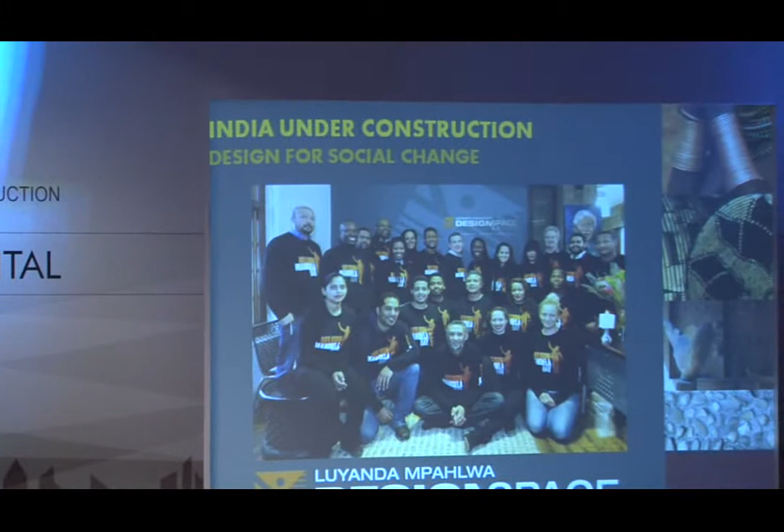Our focus in our practice is making sure that young designers and young architects have an opportunity to learn from what we do, but also that we learn a lot from them.

We are very much influenced by our cultures, our people, our lifestyles, our forms, and we derive our influence in architecture and design from the simple things that people do, like how they use mud to decorate their floors or their walls.

We use texture, we use all the things that, especially in the African context, have been used over decades to beautify themselves, using metal bangles and all that.

We asked ourselves, why doesn't architecture actually start addressing this and reflecting this in the buildings? When we did the South African Embassy in Berlin, we had to get a group of women who have practiced an indigenous technique called litema in Sesotho. It's basically about using carved plaster to decorate walls and do murals.

In fact, they used to do it in mud in those days. Today they actually do it in carved plaster, and the end product is actually mixing oxides into the plaster.

This is what then becomes the kind of colored, textured finish that we've been able to achieve, especially in that building, which has been mentioned to have received an award of excellence.

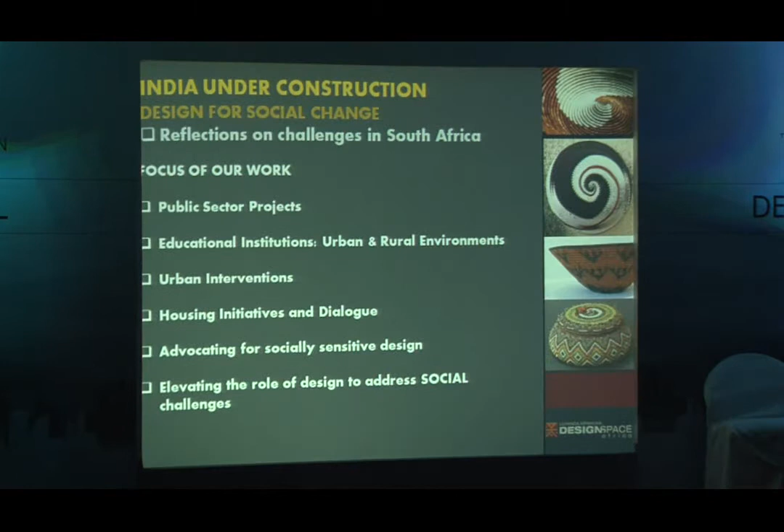This conference for us is very important. It resonates with the work we do, and I feel like I'm actually in good company. I think a lot of what I hear and what I see is not far from what we are trying to do.

Speaking about architects in India and in Palestine, I realize that these are countries, cultures, and people with rich and deep histories.

Our histories in South Africa in particular have been totally eradicated, and part of our work is trying to actually find what has made people sustain themselves over time.

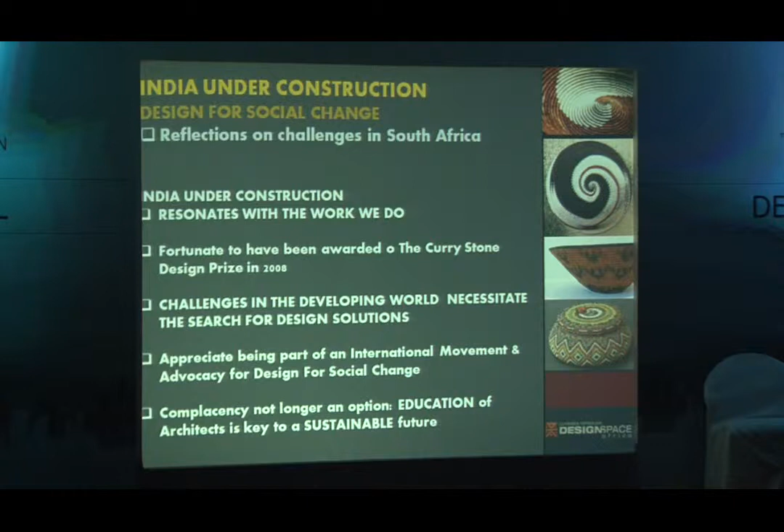Now I will briefly deal with housing, because as we were preparing for this conference, I was asked about challenges in South Africa. I'm very happy to speak after someone who's actually a specialist in housing.

We do have a government program that seeks to address mass housing, especially for the poor. This is based on a subsidy system, which basically identifies beneficiaries based on their income. The lowest beneficiary income is 3,500 Rand.

That's about, multiply by 5, so around 15,000 rupees or something like that.

You get a subsidy of about 80,000 Rand for a 42 square meter house. The next level beneficiary will be those earning around 8,000 Rand, and they then get access to either cheap loans or some kind of subsidy.

The government has negotiated with commercial banks to try and assist in running this project. But I don't think South Africa was ready, or had the proper infrastructure, to actually implement this huge task of building the millions of houses showing in the backlog.

The more houses we build, the greater the backlog actually becomes. That's the reality of it.

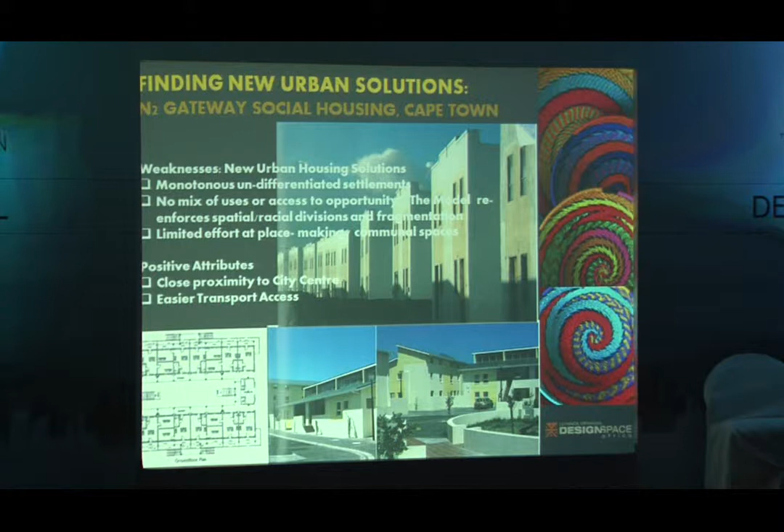So we were invited to be part of a process of trying to contribute low-cost housing design by Design Indaba in Cape Town. And the real challenge of this place is that there's no spaces, as we've been hearing the whole day, no spaces for people to unfold, to recreate, for children to grow, for children to play, which is basically what children want to do.

And what you also find is that there are challenges of fires in these places because they are unsafe. They are built with materials that actually will catch fire. People use paraffin stoves; even though there's an insurgence of electricity, you can see the poles similar to the streets of Delhi and Mumbai that I see. But the dangers of fires are real, because Cape Town is a very windy city. Any fire that catches spreads like wildfire, actually.

And what you find in these places, obviously, is the dense and informal economies, which is about urban survival. There are people who are actually producing the shacks so that you don't have to build your own. You can actually get it prefabricated, and then you just go and build it.

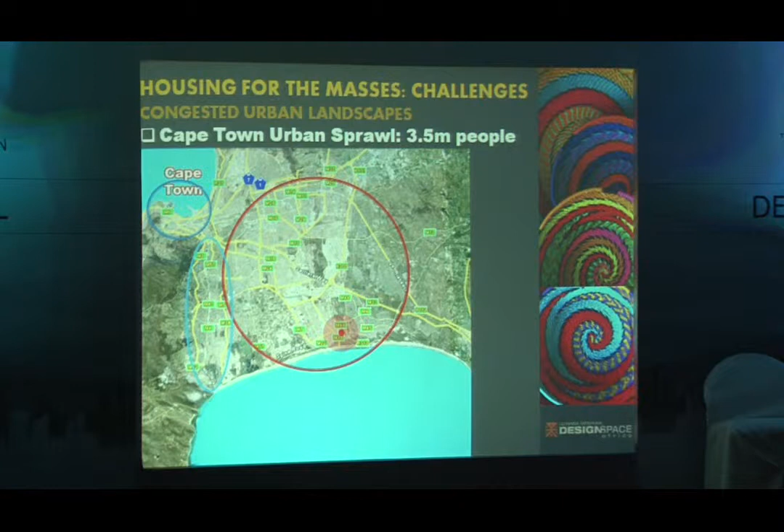That is what is supposed to be the area where black people live, and in fact in South Africa we have South Africans of Indian origin who have got their own areas. We've got black people who've got their own areas. We've got colored people with their own areas. It's still there, but maybe physically it's going to take us decades to actually change that environment.

These are how the townships work or feel like. Quite established areas, and you can see there's a lot of temporary stuff happening along the edges, and then you've got the new areas happening at the back. And this is just another picture of the roofscapes of how it actually looks, all built under power lines, and people tap. There is a huge electrification process that has happened in both rural and urban conditions.

Now, what we did then was to, as part of this design and our process, investigate how architects can respond differently to these challenges. And we found that architects actually hardly ever discover things. They find the potential of materials that are already there, and then use those differently.

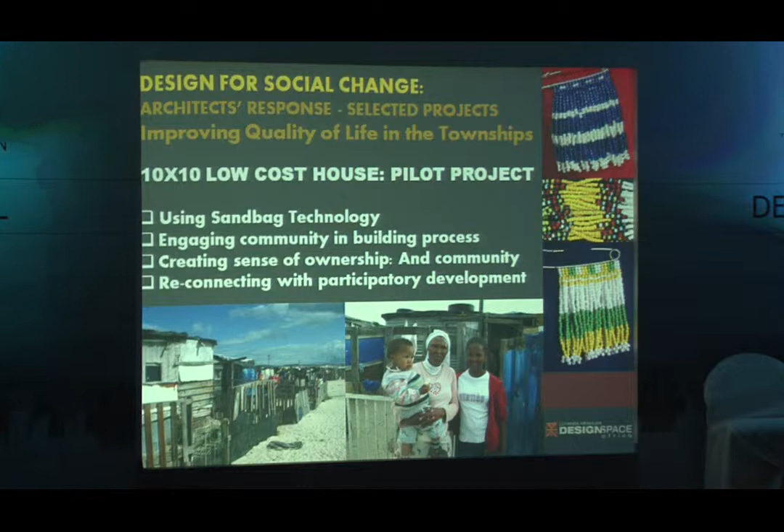So we found the sandbag construction, which we felt is quite important in that it actually brings back the aspect of community being involved in building. And we found that this is a very important thing. It's been mentioned the whole day, how people derive ownership by just being involved. And this was very important for us.

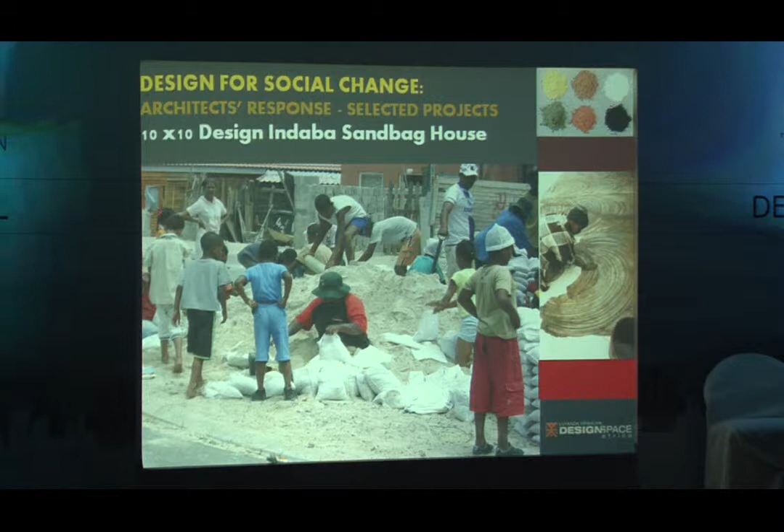During construction, we had the entire community of the 10 buildings we're doing, building from one house to the next. And we obviously had to first convince them that building a sandbag house would get them a decent housing product. We had to use models to actually explain how the system works.

It's a timber frame structure, basically, spaced at about 900 centers. In later projects we've reduced this to about 600 because it makes it easier to build and to plaster or to clad. You have the bags packed in between that structure, then you have your wire mesh so that you can have your plaster holding onto something, and then you paint after that.

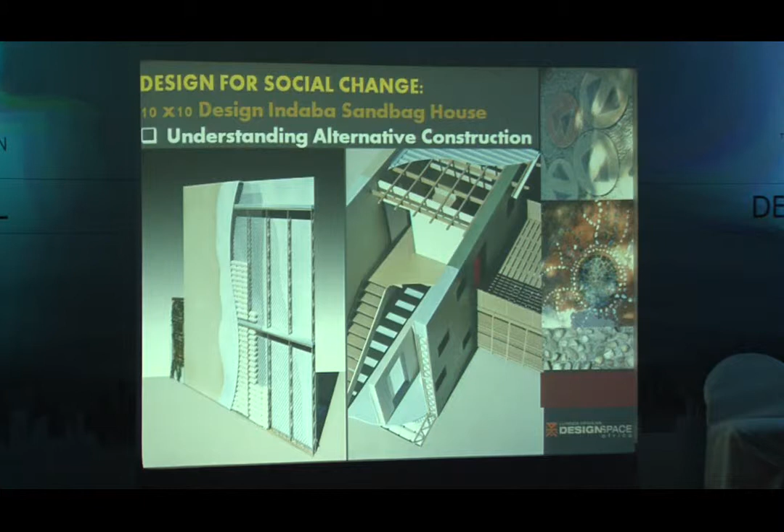We use all this to convince the people that firstly it will be a safe building. We worked with engineers who had to convince us that we need a ring beam here - this is the only place where we've used concrete, and at the top here to hold the roof, because the eco beams are actually only about 2.5 meters high. You could have them longer if you use a different material, but we've tried to avoid materials that have a toxic or high energy content in manufacture.

And this is basically the plots that were allocated. Unfortunately, we could not change the fact that everybody was allocated a plot. If I had the choice, I would have liked to do a completely different urban layout.

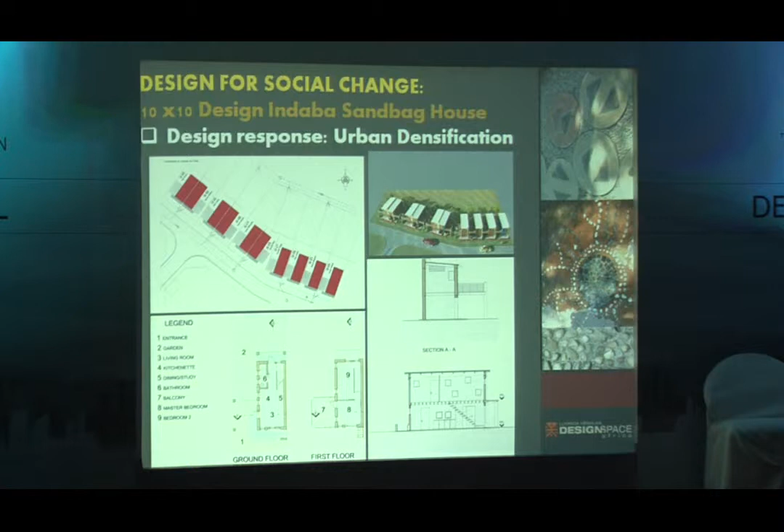This is simple double-story buildings with the bottom being kind of a lounge kitchen area with stairs going up, wet cells at the bottom, and then you get your stairs. We did 2 bedrooms at the top, the bigger one being the children's, because the people who live here have large families. We tried to make sure the kids have space and a little corner where they can study. The parents get a smaller room, but they also get a balcony outside, which we saw as an area where the house could grow - kind of an incremental approach, things we learned from the Charles Correas and so on, but doing it at a very small scale here.

This is how it happened - these timber frame structures with a metal lattice were brought to site, and we were engaging with the community in terms of getting this put up. No foundations other than basically having sandbags on the floor, on the ground, and then you put this thing on it. Because we've got quite high water tables, we provided some kind of damp proofing, and then the building goes up. This was kind of like the start of the ground floor.

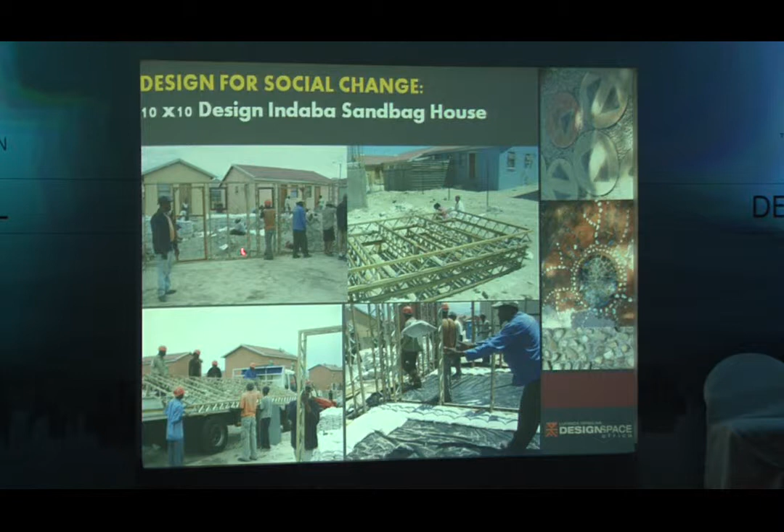And so it goes on, and I think this is the building that has made us to be actually here in India, because when you do these small, very problematic, almost difficult projects, you realize that they give you more than any embassy you've built - this kind of project has made us as known as we are today. We think it is an investment. It is social capital. It is design that makes a difference, but it's also design that engages you with the people and the realities of how people actually live.

It is important for young architects to be prepared to go that route, because it's not a simple route. I always say in the office, we spend the most time and resources on this project proportionally than any project we've ever done. But obviously, the results have shown.

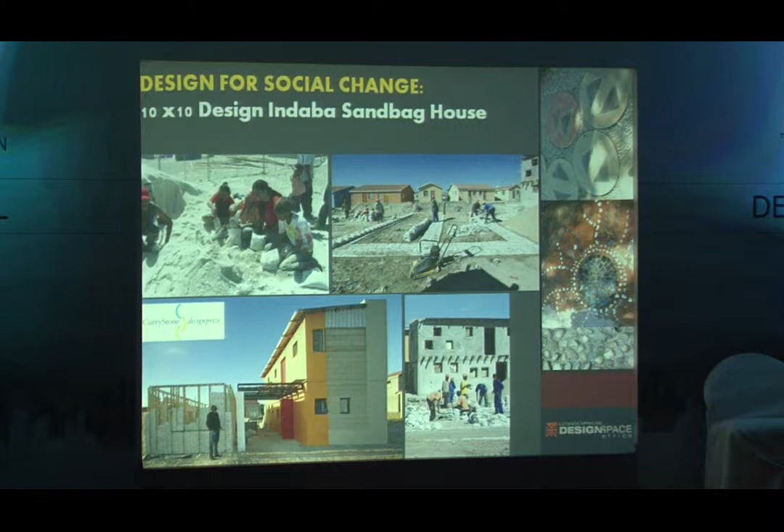And in fact, we were also part of the design with the Other 90% cities exhibition in New York. And just pictures of how the construction was going.

We chose to have single double-story units because everybody expects to have their own space, so it's not everyone living on top of each other. This is one family unit, 54 square meters as opposed to the 42 square meters which the government offers. We also chose a back-to-back row house type construction to save on the wall in between, so it's not just standing on its own.

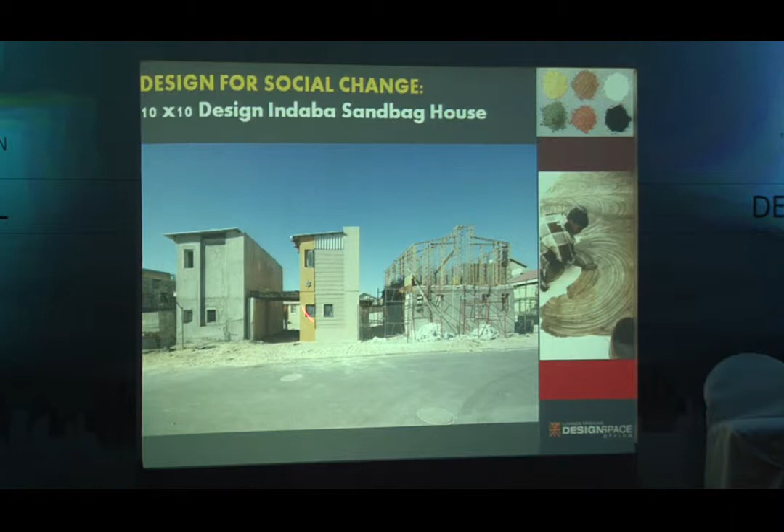This was part of the experimentation, and these are the spaces that you create. This is the children's room.

You can see that we spread the windows, as in all African buildings, and I think it's the same in India - you'll never have large windows. You have small ones because you don't want the sun to penetrate into the inside of the building, since glass is the transporter of heat. So instead of having big window areas, we decided to spread them into small components, but you can see the amount of light they provide inside the space.

Some of these houses have now got double bunk beds because this was the idea. They had just moved in here, coming from a shantytown squatter situation where they didn't have all the necessities we have. The buildings are occupied now.

As part of this project, solar geysers have been provided, and kids are actually using that balcony that we've created as a play space, because there's hardly any play spaces around.

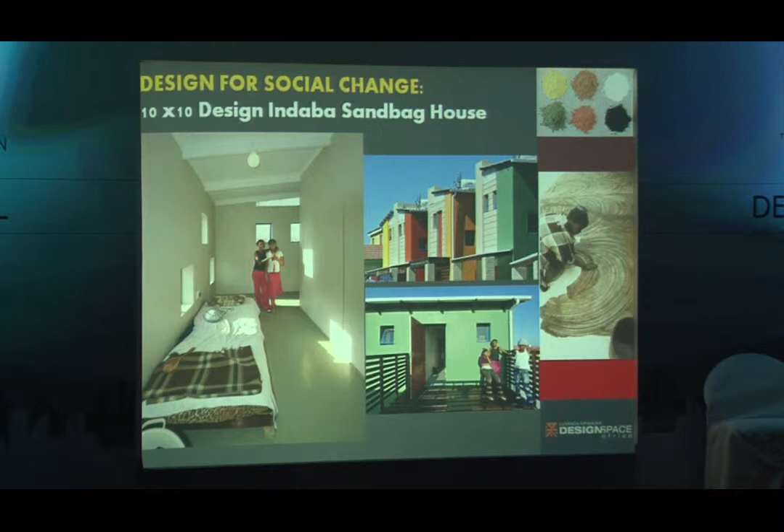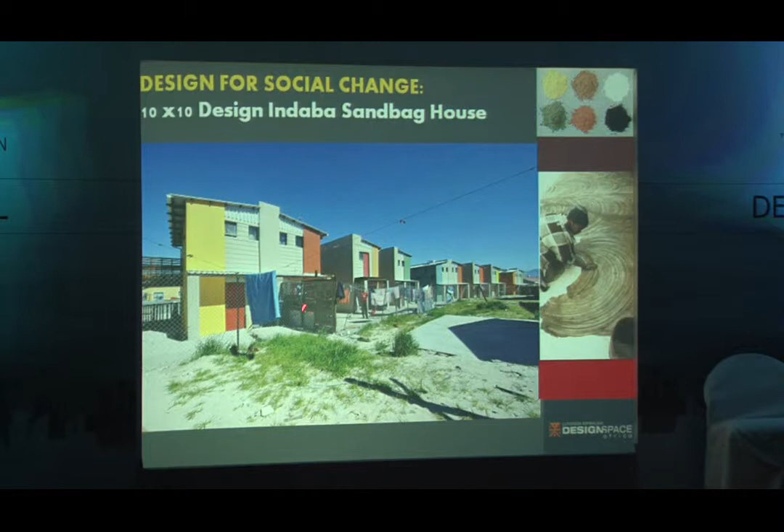This is how it looks from the back. They are actually being used, and if you go there today, you'll find a lot of the families are extending at the back to create themselves additional space.

This is how it looks from the front. We decided deliberately to bring the buildings as close to the edge of the street as possible. If you go there now, similar to what Fida was saying, there are fences built with corrugated iron, others built in timber, and it's kind of having its own life.

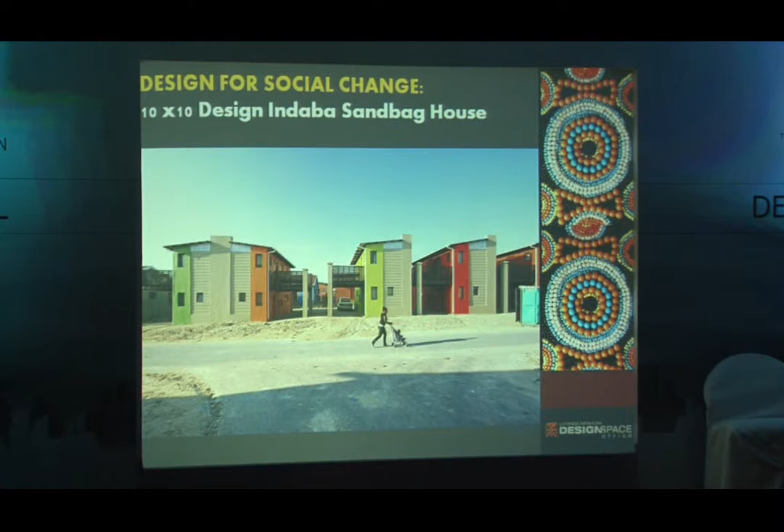We tried at the beginning to give guidelines, but actually you shouldn't do that. People are occupying the space as they wish, and whether we like it or not, they're doing what they do best. Talking about individuality of color, we had the same approach where each house has got its own color. These things are derived from how people dress, how people do beads and all that.

Because this is all part of how people live, using simple things to make their places beautiful. We've continued with the sandbag exploration, and have just finished a soup kitchen building - not big, very small, 104 square meters. We're trying to see how best we can take this construction further.

It was not just a once-off thing. As I said, we're now putting the frames a little closer, using staircases outside so that we can maximize the space inside.

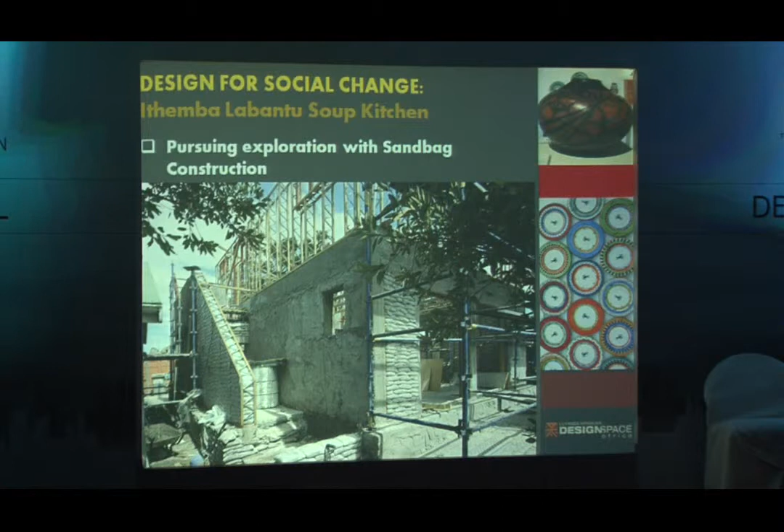This is how the building actually looks. Here I was hosting a group of French architects who had come to see what we're doing in the townships. This was when we were putting the ceiling for the top floor, and this is how it looks.

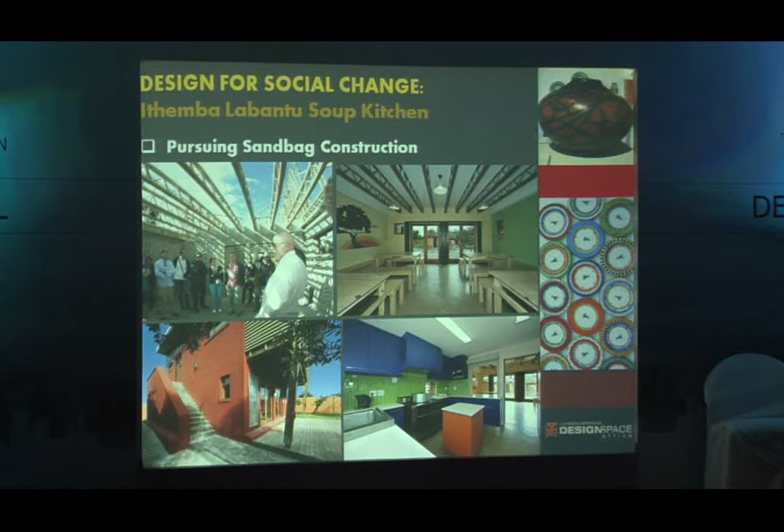We've kept the Ecobeams actually exposed because we don't have to hide the construction - people must know and see what it is all about. This is a soup kitchen that is actually feeding about 250 children every day, and giving them also facilities for aftercare in these township conditions.

What we've done differently here is use timber boarding inside to make the spaces a bit warmer. In the first buildings we plastered everything, but in this one we decided to continue the whole process of sustainability and use timber, even though it's supposed to be a low-cost community building.

This is how it looks overall - the bottom is the kitchen and eating area, and upstairs is where the children have their computer rooms and places where they can do homework, and that space also becomes used for dancing and other extramural activities.

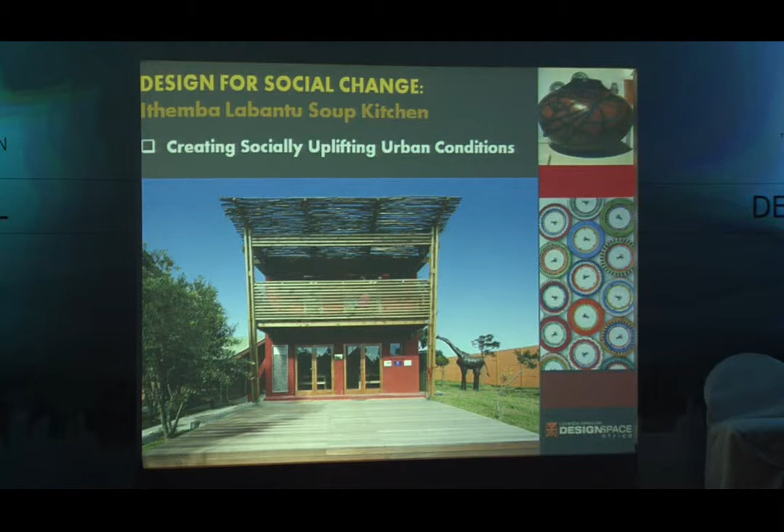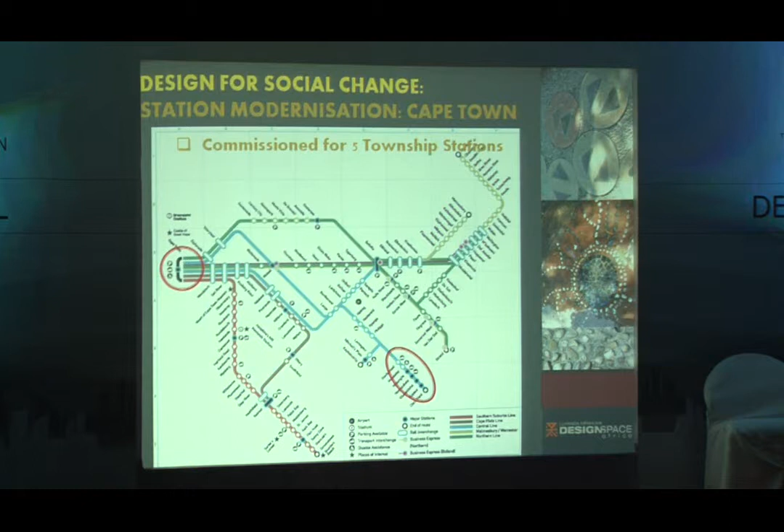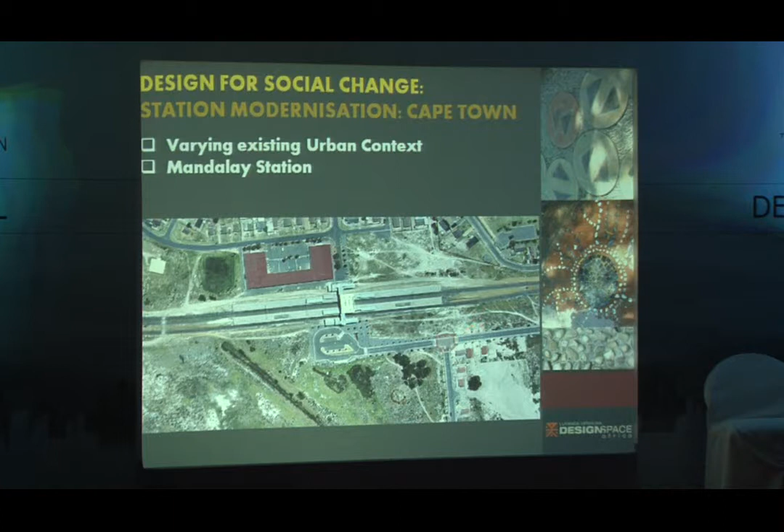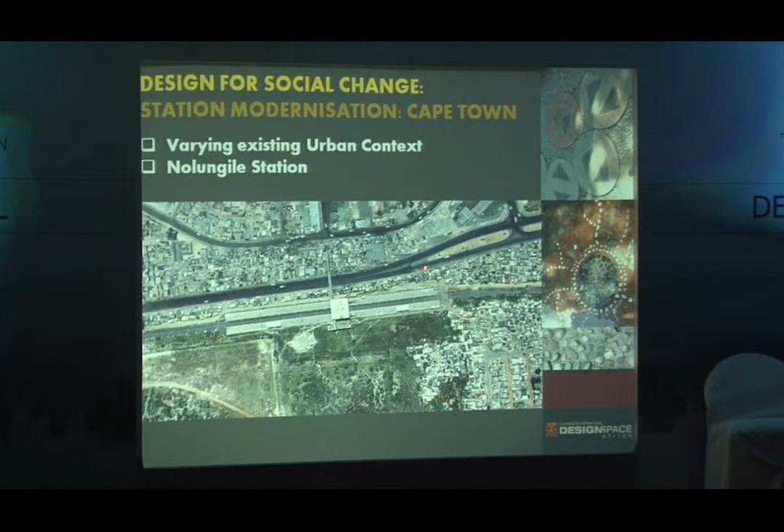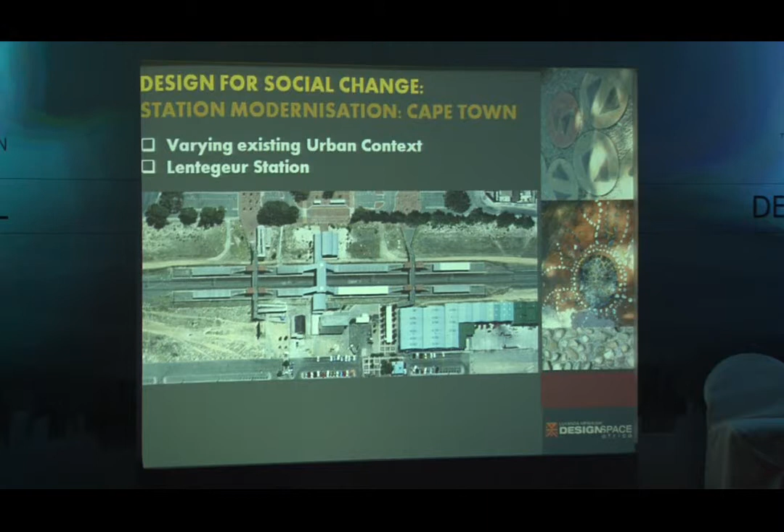Some of these are in residential areas, others are feeder stations for a larger area. We looked at different conditions, some squatter areas around the station, very dense, and the stations become trading hubs. Others are totally fragmented, you don't know where the entrance is or where the main station is. Someone can come straight to the platform through the main station building, or come through here, so there's a whole problem of controlling tickets. The rail agency is actually trying to create a different environment.

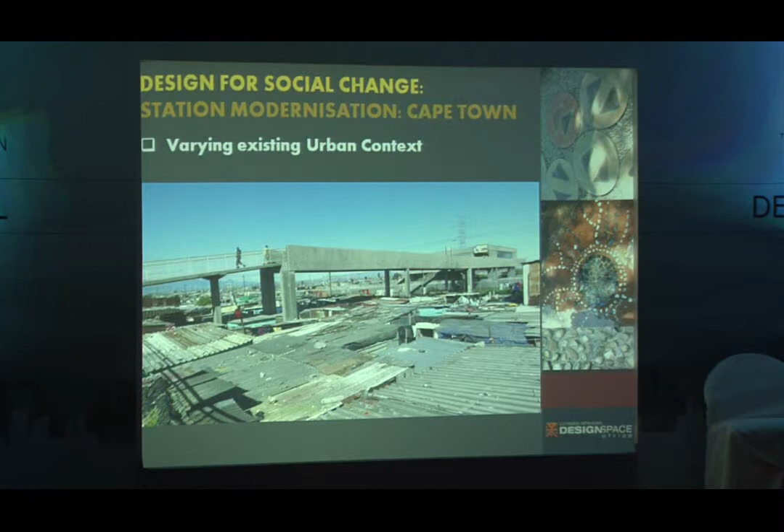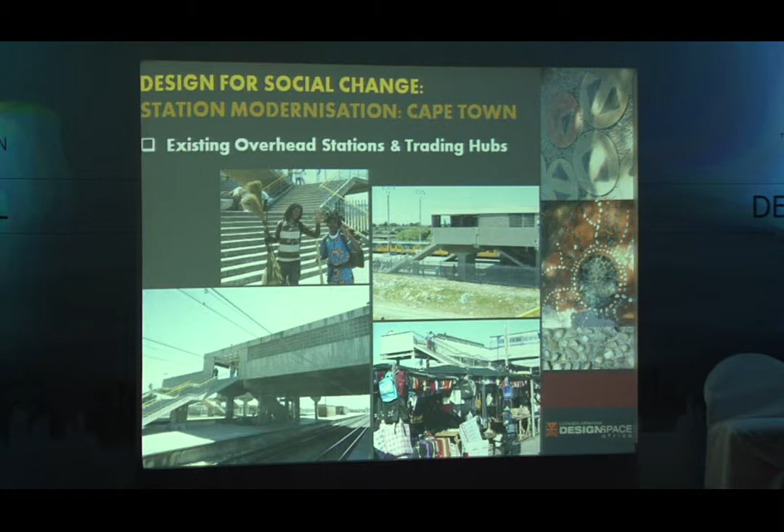There are bridges over these shacks leading to the station. These are so-called overhead stations, where from the ground you go up and then down to the platform. You've got heavy staircases people have to traverse. In some situations there are ramps, in others there are not, so we as architects have to respond to that. These are hubs where people trade informally.

I don't think it's different in Mumbai, and in India in general. Ramps become areas of trade where people sell everything possible, from traditional medicines to belts, pantyhoses, everything you can find. We thought it was important to understand who we're actually building for, and what kind of environment we want to provide for them.

This is the existing station. These stations are totally overcrowded, and you can see they need to be 3 times bigger. Most important is to create urban nodes at the ends where there are trading areas.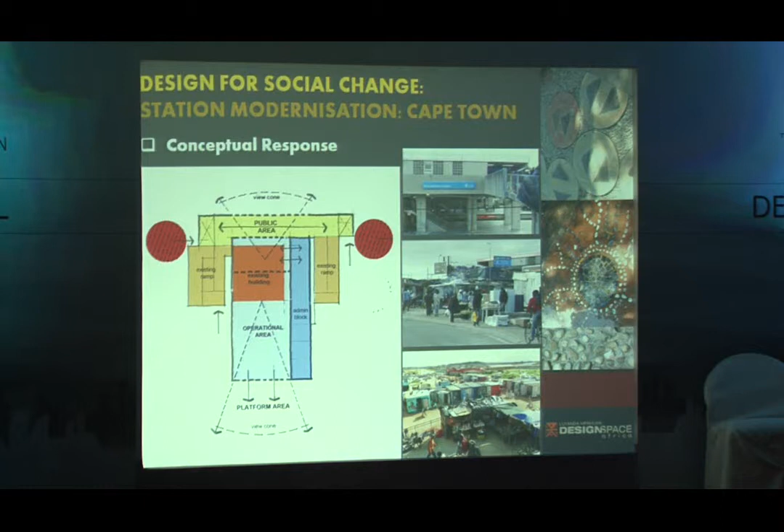This also speaks to the design processes we engage in. We use the metaphor of coming up from the ground down to the platform to inform the design of the station. We tried to increase the volumes so you get more light, more airy conditions, rather than the flat box currently carrying about 70,000 people every peak hour, every 15 minutes.

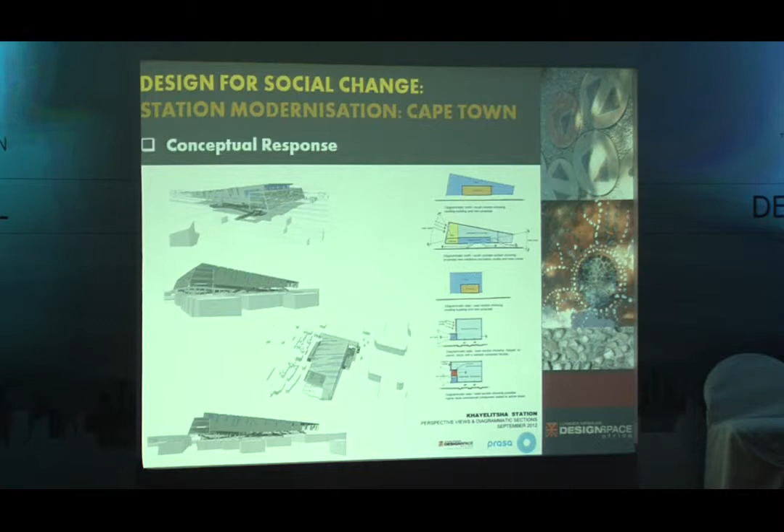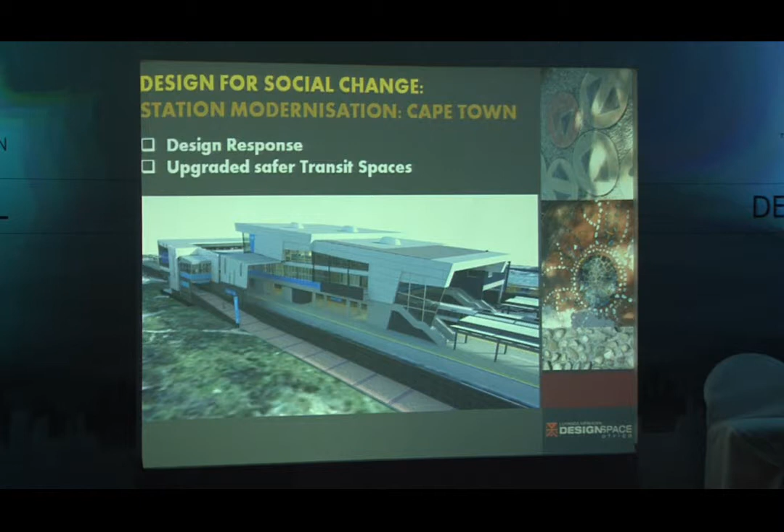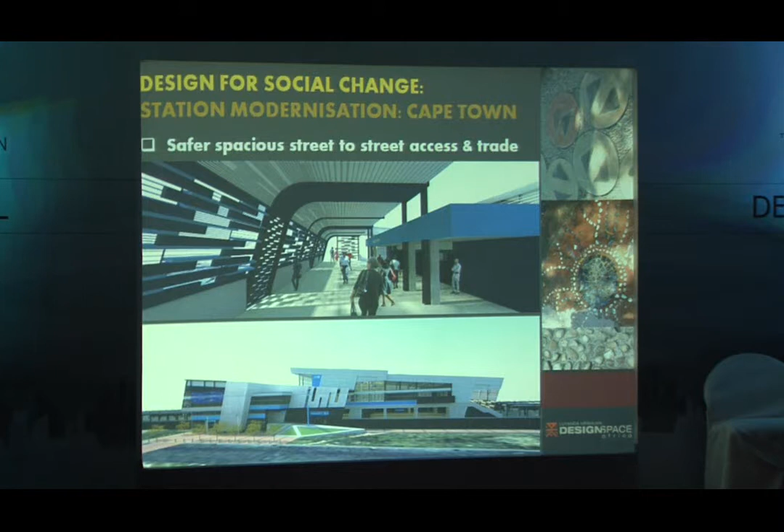This is the kind of response we've come up with: a totally modern station, but with all the facilities people need day-to-day still provided, creating street-to-street access with light and air. This is the original box, which we've integrated into the design, so we can utilize it because the station has to remain operational as it is being modernized or refurbished.

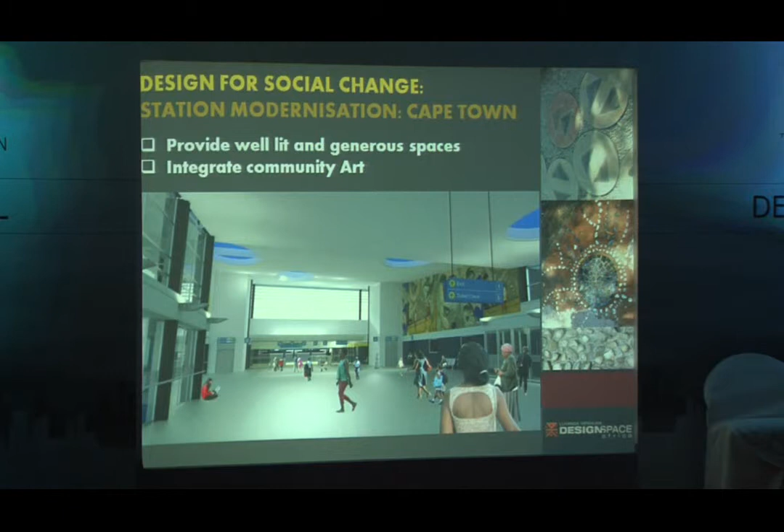Higher volumes, more light, airy spaces, integrating community art as well, because we have to work with communities in these things, otherwise people will be totally alienated from them. We know this picture very well. We have not come that far yet, but we're trying to avoid getting there.

The last project I'd like to share is eradicating mud schools in the rural areas of South Africa, this picture I took in 2012. This child is disinfecting the classroom. The school had just closed, using cow dung, and people have used this over the years to disinfect because they've found cow dung is actually quite healthy. I got there and she was doing this after school to disinfect the classroom.

This is the kind of classroom they had, a mud classroom, totally inappropriate, and in some situations a whole row of classes like that. Here it's really about, we had to build 50 schools in 1 year. I think someone else had to build 300 in 3 years, and I thought, oh my God, I'm complaining about only 50.

So in order for us to deal with 50 in 1 year, we had to introduce or find an approach that would allow us to do that. I had 6 weeks to go out to tender and call for construction from day of appointment. So we decided...

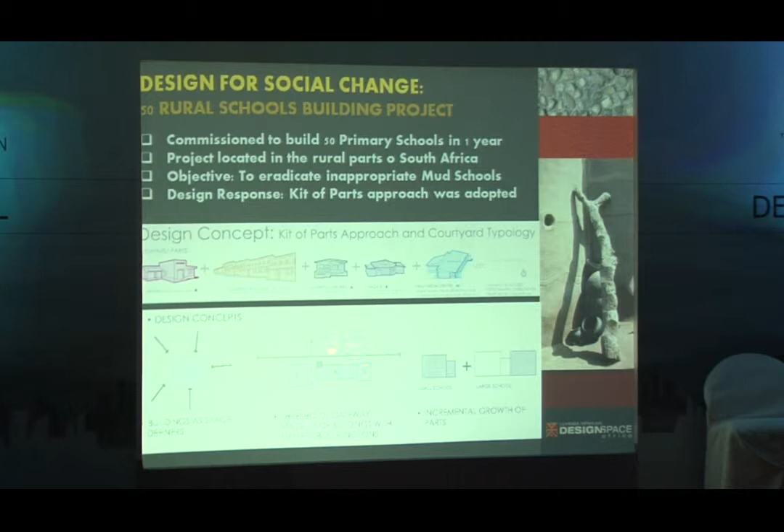...with the team to approach it from a kit of parts basis. We designed every kit, and this is what would then be given to the builder for all the schools, coming up with a site-making process. And we went back to what we know.

How to organize buildings, not make complicated structures. Individual buildings, these are the kits. The purple here is what we needed to integrate if there was an existing classroom, which was decent enough to be kept. Then you would have your admin classrooms, admin building, nutrition, and then we would have to put grade R as well, which is a requirement now by government.

So we did this on the different sites, but having designed the kits individually, what we would do is to then rearrange them. And here, there's a tree that we found on this site, and we also wanted to build a school around that tree. And these are the buildings, because out of the 50, in the second year, we are now on number 40. So we have till the end of the year, hopefully, to do the rest of the 10, which I think in the conditions we have is an incredible achievement.

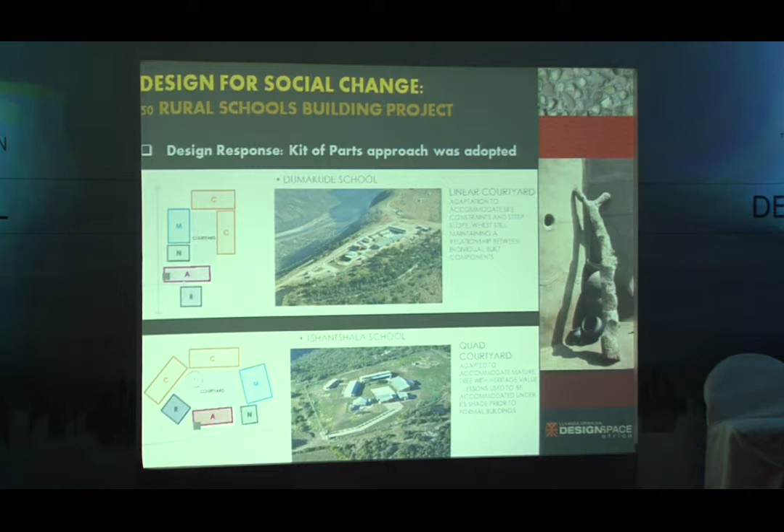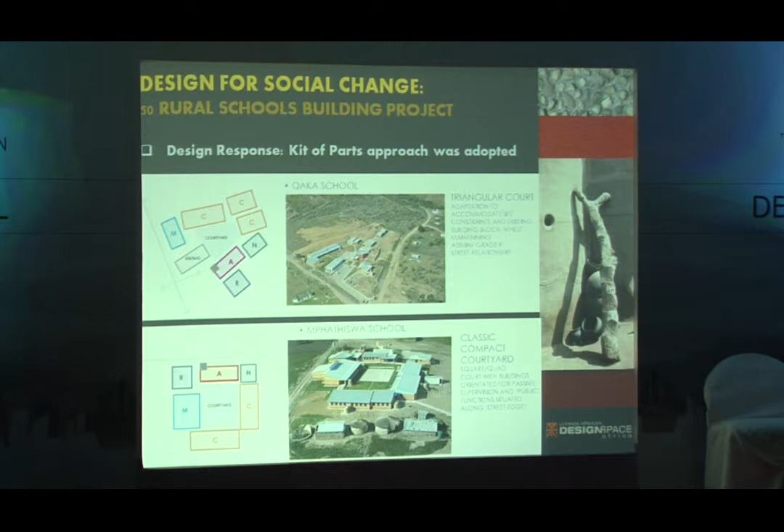Just going through this, just showing you the different forms that you get. This is what you do when you use your design skills to respond to a given situation. And here, there was not supposed to be a school, but the government had decided every building is 3 meters from the other in terms of height difference. It's a very steep slope, but we had to make it work, and we had to integrate this existing building.

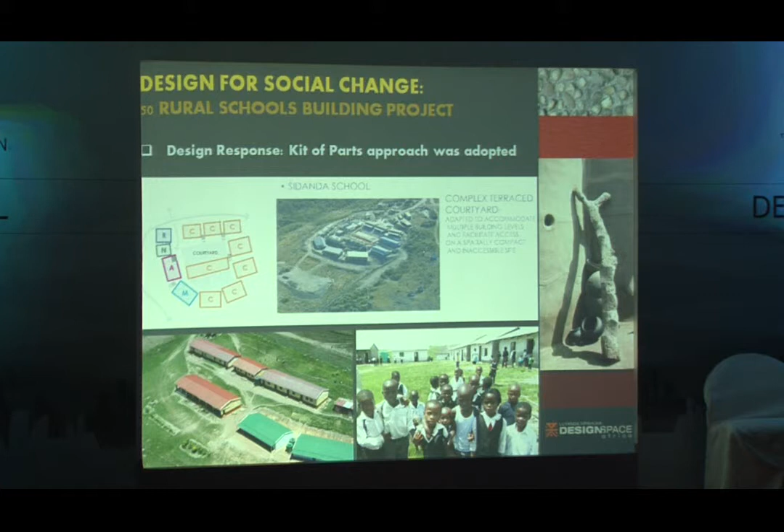Now, this is a typical rural school that you get. No kind of placemaking opportunity, and we said we do not want to end up here. You will realize that insofar as the grade R is concerned, we also had to do some kind of psychology of design, because kids come from this environment. They come to school on the first day, and you don't want them to be alienated.

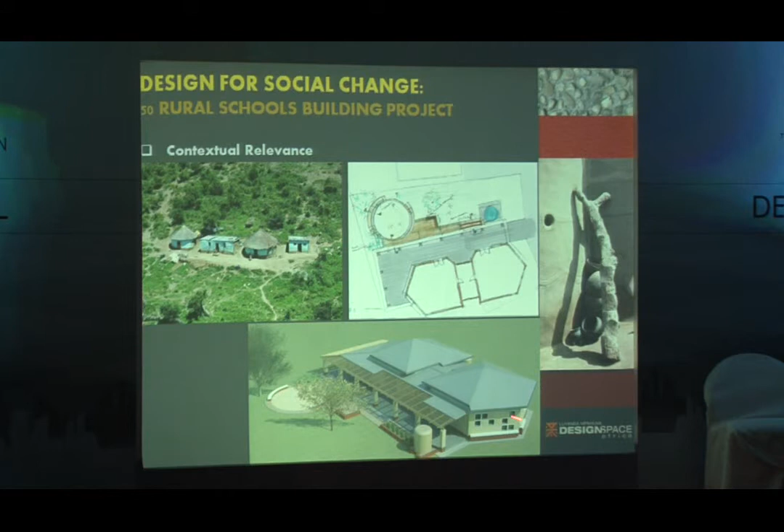So we decided to make the grade R to be kind of similar to home, with the sandpit, play area, and the big veranda, because we've got the challenge of heat and a lot of sun, and again, small windows that are spread so that you can avoid a lot of sun.

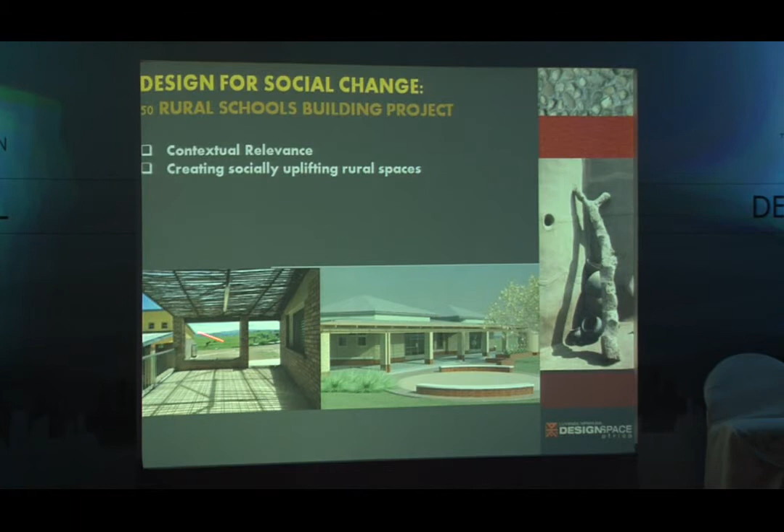And these verandas, we just use wattle, what we call latte, to create these shaded spaces, and again, use color to differentiate the different buildings. This is the original classroom they had, and we've reinterpreted this into grade R, and created new classrooms. This is how it looks inside and how much light actually falls into that space.

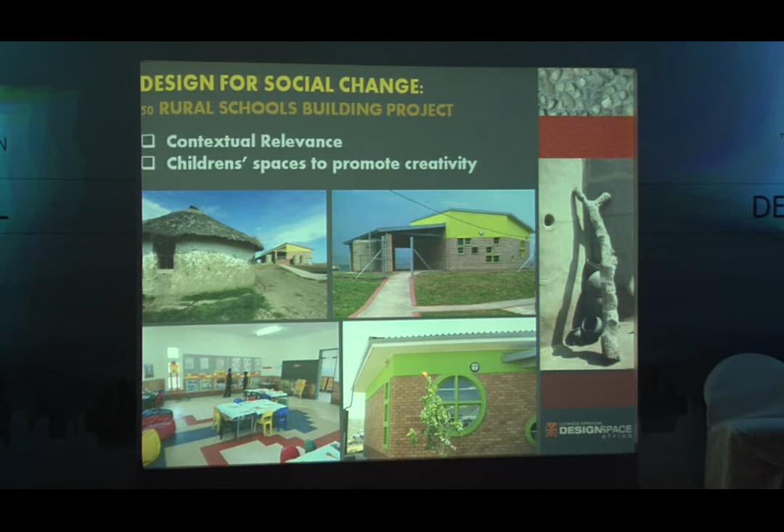Taking these forms and using different kinds of windows. You want children to be creative, to be kind of experimental. They must be able to peep at their lower level, and also when they're bigger. When they're small, they look through here. When they're bigger, they look through there. When they're really big, or the teacher at least, can look through and see the environment.

Luyanda, we've overshot the time limit. All right, I'm almost done.

That's the old school. This is the new school with a yard, with an assembly area, a grassed area for kids to be able to also sit on grass, not only on concrete. Your admin building is a center space that can actually supervise the kids.

We introduced the idea of rainwater harvesting by convincing the government that each school needs about 20 tanks so that we can collect the water. These areas are not on the grid, they're not in the municipal water system, and you want kids to have water to drink. And this is one of the things we found when we're doing this.

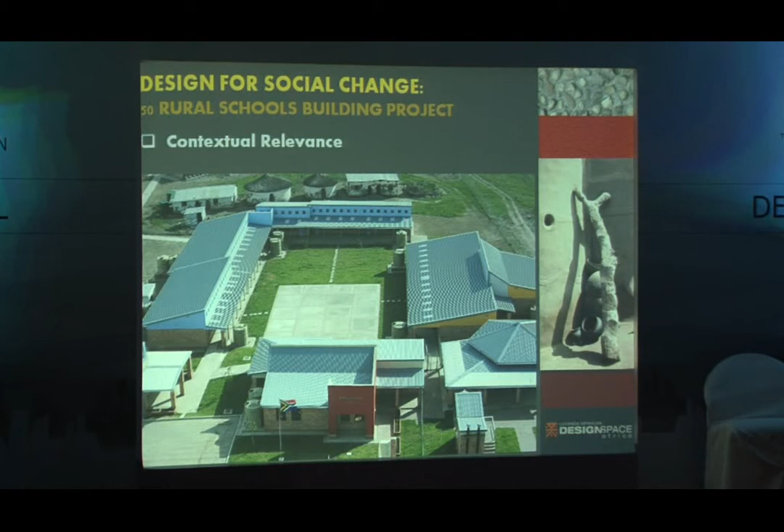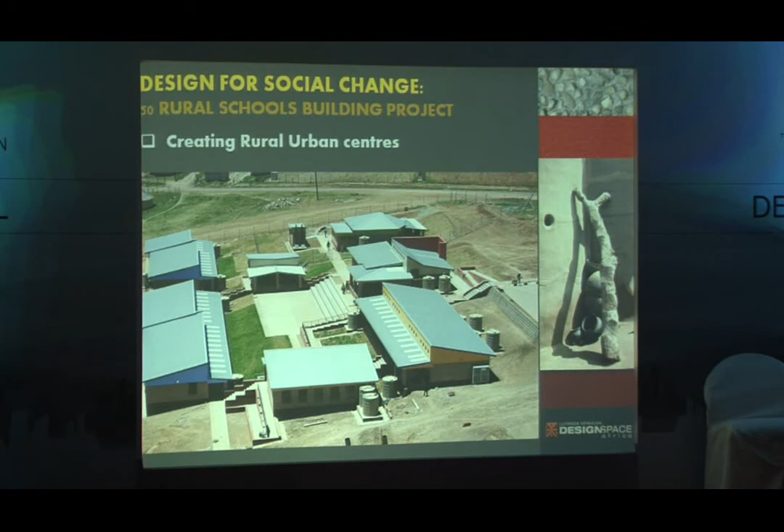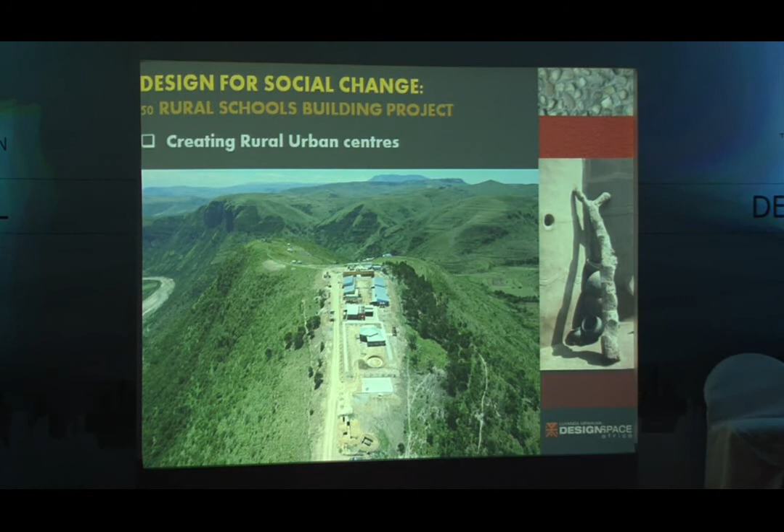This is how these schools are looking in the environment. They are becoming urban centers actually there. And the different challenges of site and topography, and how we've responded to them. And this is just a landscape of rural areas in the Transkei area with rivers. This is not far from the sea.

And for us, it's meaningful social change because it's about the future of the children. And I think if we invest a bit of time in creating those spaces where kids can unfold, then we will have done our job.

Just the last 2 slides. Cape Town, as it has been mentioned, is World Design Capital 2014. And we hope the Rahuls and all our colleagues, friends, will make sure that they are part of the events that are going to unfold. But 2014 is actually focused South Africa, because the UIA Architecture Congress is also in Durban. So we're very fortunate that we can be in a situation where

all design focus, architects are going to be focusing on South Africa next year, and it happens to be 20 years after our democracy, so we'll be celebrating it through design. Thank you very much.